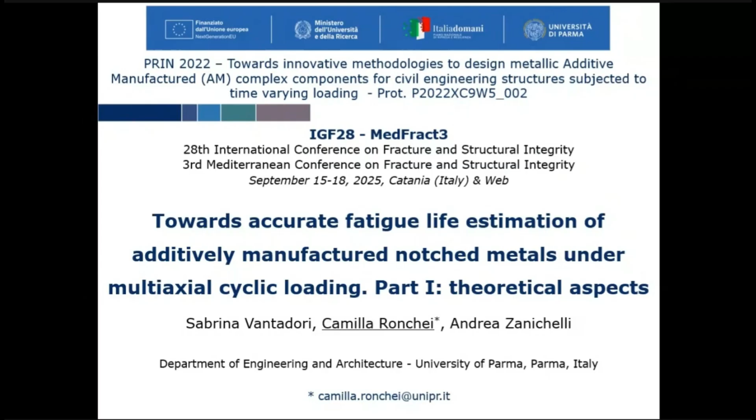The present work deals with the proposal of an analytical methodology for the fatigue assessment of notched components made of additively manufactured metals subjected to multi-axial cyclic loading. Such a methodology is based on the application of the multi-axial fatigue criterion proposed by the research group of Carpinteri and Vantadori and the Taylor's point method.

The novelty lies in the identification of the critical point where the criterion is applied through the formulation of a novel critical distance, departing from the conventional El Haddad intrinsic crack length originally proposed by Professor Taylor for conventional metals.

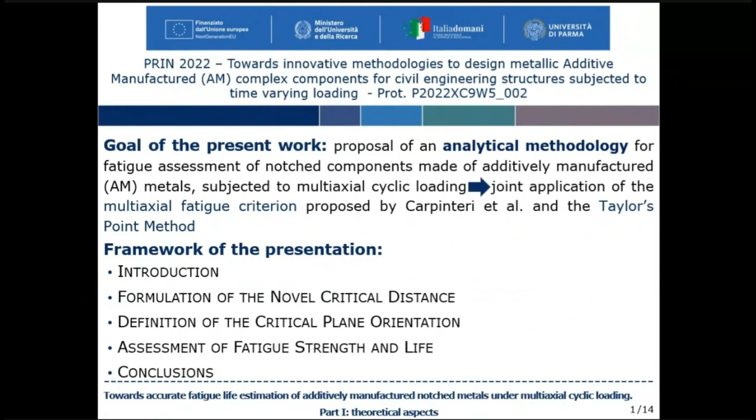My presentation consists of the following sections: a brief introduction related to the fatigue behavior of additively manufactured metallic components, then the formulation of the novel critical distance, the definition of the critical plane orientation, together with the assessment of fatigue strength and life, and finally some conclusions.

As is well known, additive manufacturing is characterized by many advantages with respect to traditional manufacturing techniques. For example, it allows the realization of customized structural components with complex geometries, and a considerable low material waste is produced by additive manufacturing.

However, AM components still face several open challenges related to uncertainties in their structural performance, especially under complex cyclic loading typical of in-service conditions. AM components are particularly susceptible to fatigue-related damage due to their typical high surface roughness and the presence of internal discontinuities. These serve as stress concentrators, which promote early crack formation, thus causing a shortening of the high cycle fatigue life.

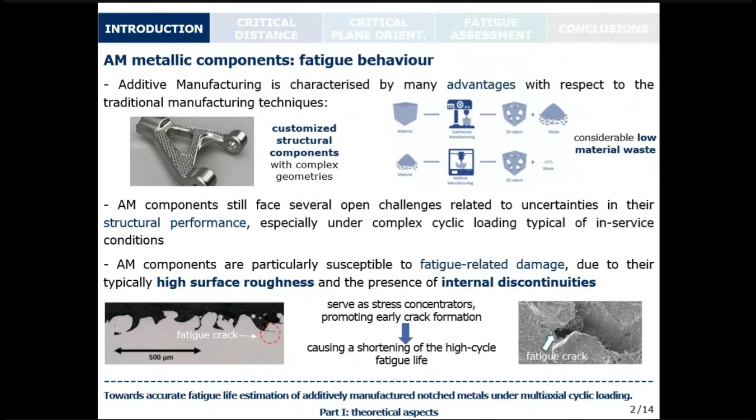Moreover, these detrimental effects become even more severe in the presence of notches or other geometric discontinuities, which further amplify the local stress fields. In particular, the combined effect of intrinsic AM defects and geometric discontinuities in a component subjected to multi-axial loading conditions results in a highly complex multi-axial stress state with multiple competing crack initiation planes influenced by both the orientation and the interaction of the principal stress directions.

Nowadays, therefore, the goal of research in the AM field is still to find and validate advanced criteria for the fatigue assessment in order to better exploit the use of such a powerful manufacturing technique. In this regard, it has been found in the literature that criteria based on the critical plane represent a valid tool for the fatigue assessment of AM metals.

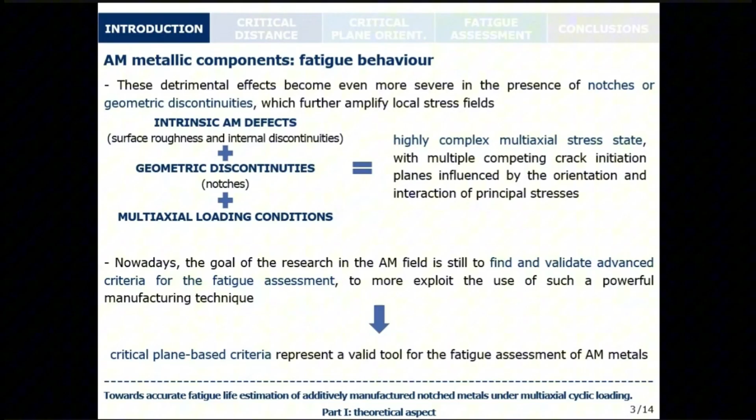In this context, the present work proposes an analytical methodology representing a first attempt to estimate the fatigue strength and life of notched components made of AM metals under multi-axial, medium, and high cycle fatigue conditions.

The main steps of the proposed methodology are here summarized. First, some input data need to be defined. Then, the novel critical distance is developed. The critical point PCR is identified at a distance equal to half of the critical distance RAM.

At this point, the stress field is computed through the formulation proposed in the past by Lazzarin and co-workers. Then, at this point, the critical plane orientation is determined and the fatigue assessment is performed according to the multi-axial fatigue criterion by Carpinteri et al.

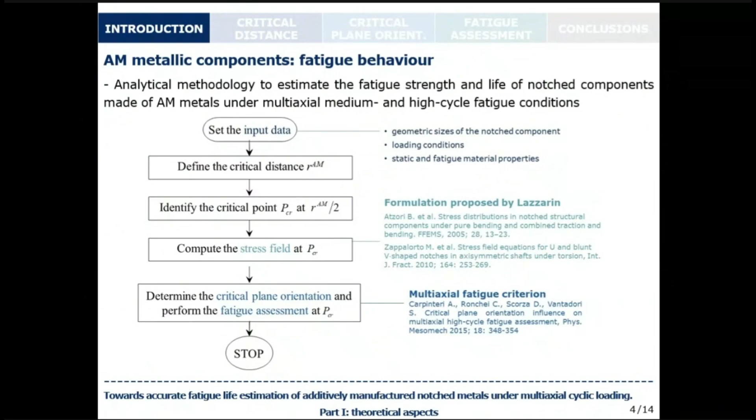Now, let me emphasize the innovative aspects of this work: the formulation of the critical distance and the identification of the critical point where the criterion is applied.

Although the main concepts of the point method are here adopted, the critical distance adopted to locate the critical point differs from the conventional value of the El Haddad intrinsic crack length, originally proposed by Taylor as previously said.

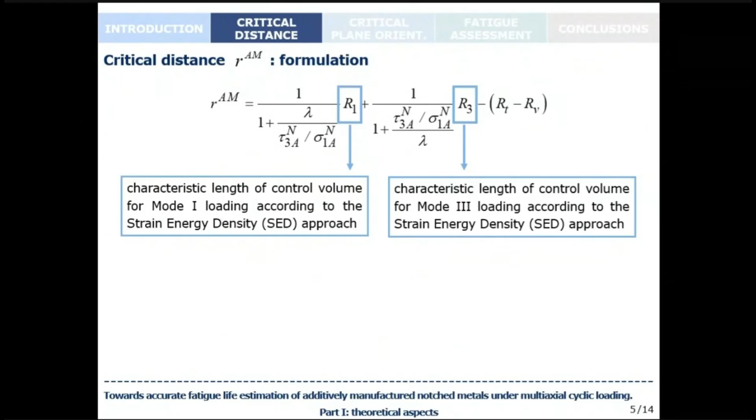In particular, the relationship for the critical distance RAM here developed is given by the present equation, where R1 and R3 represent the characteristic lengths of the control volume for mode 1 and mode 3 loading respectively, computed according to the strain energy density approach. The critical distance also depends on lambda, the biaxiality ratio, defined as the ratio between the applied shear stress amplitude and the applied axial stress amplitude, the ratio between the fatigue strength of notched specimens under mode 3 and mode 1 loading, and also a function of some surface roughness measurements.

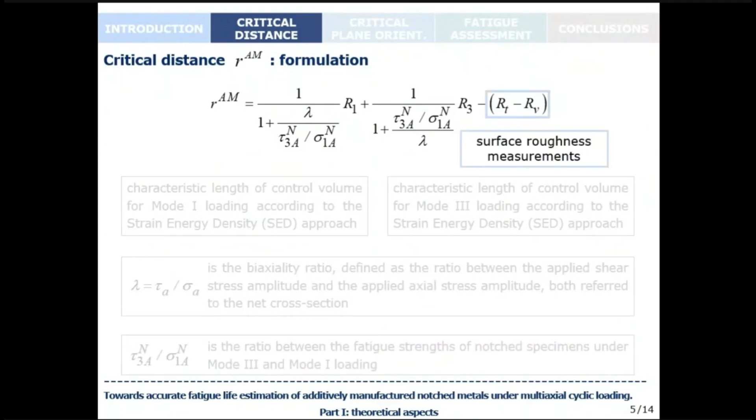Moreover, lambda in this term is divided by the ratio between the fatigue strength of notched components. It can be observed that for the same applied stresses, when the notched fatigue strength in mode 1 is lower than that in mode 3, the first term of RAM becomes more similar to R1. Analogously, when tau 3 AN is lower than sigma 1 AN, this first term approaches the characteristic length of the control volume for mode 3 loading.

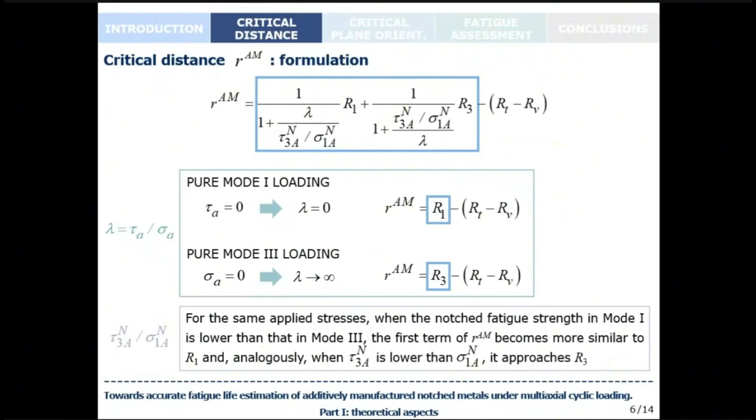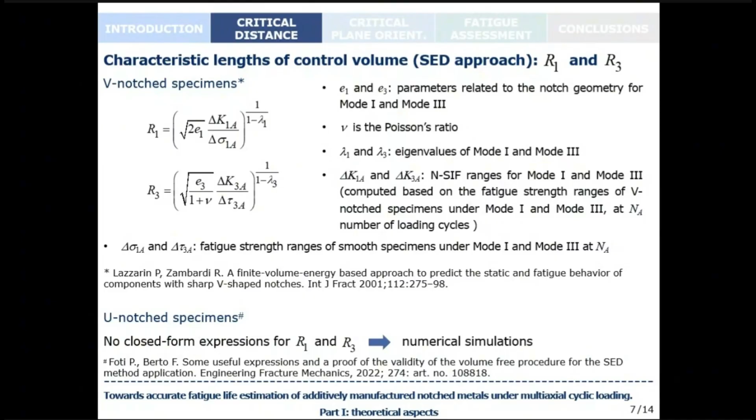As just said, the characteristic length of the control volume depends on the fatigue strength of smooth specimens. In this work, these fatigue strengths are evaluated as a function of the defect size present in the AM component, following an approach similar to the well-known one proposed by Murakami for conventional manufactured components.

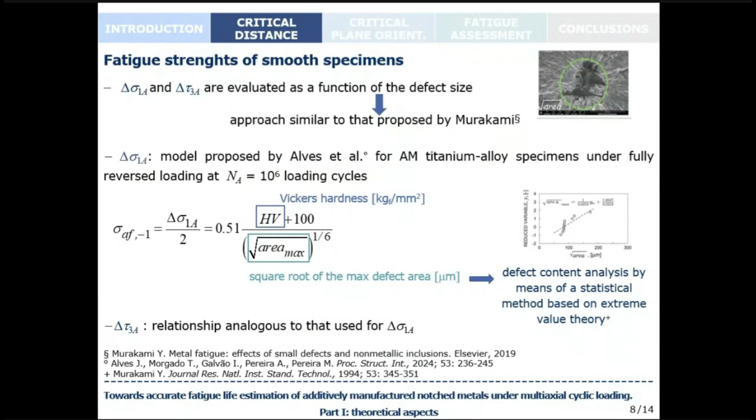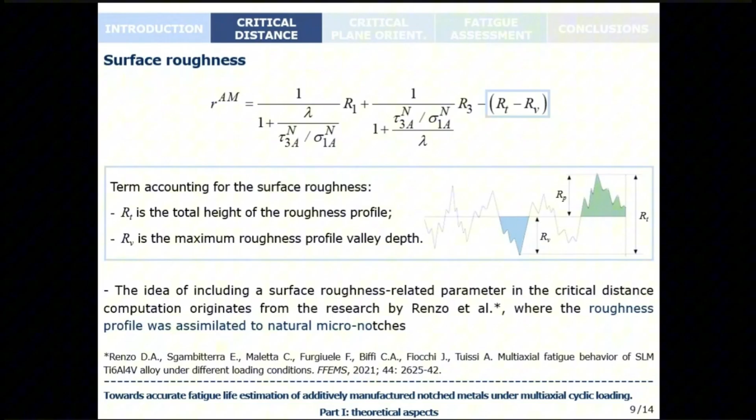Moreover, the critical distance RAM, as already said, depends on a term accounting for the surface roughness, that is RT and RV, which represent the total height of the roughness profile and the maximum roughness profile valley depth respectively, as depicted here. The idea of including surface roughness parameters in the critical distance computation originates from research performed by Renzo and co-workers, where the roughness profile was assimilated to natural micronotches.

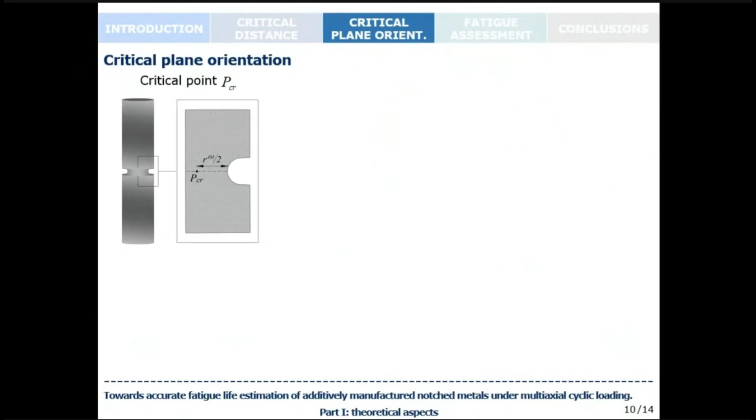Once the critical distance is defined, the critical point PCR is identified at a distance equal to half of RAM from the notch root along the notch bisector. Knowing the stress field at this point allows the computation of the principal stresses sigma 1, sigma 2, sigma 3, together with the corresponding principal stress directions 1, 2, 3, identified by the principal Euler angles phi, theta, and psi.

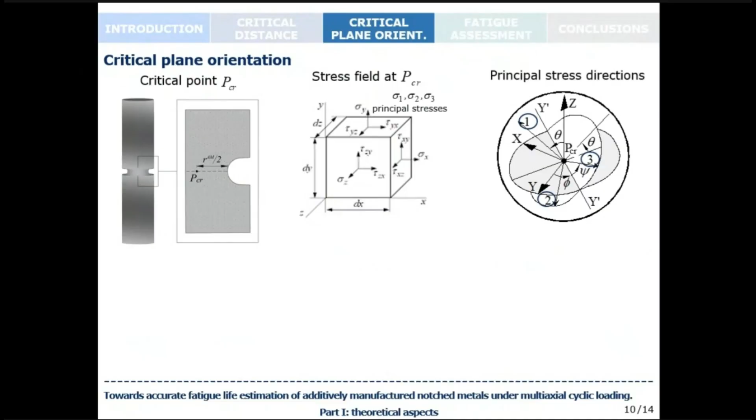Since the direction of the principal stress axes are generally time varying over time in case of multi-axial cyclic loading, their average direction has to be taken into account.

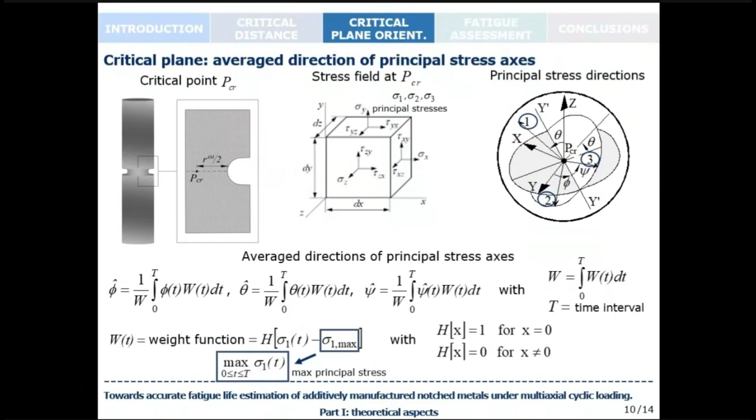In particular, by using the weight function here reported, the average direction of the principal stress axis coincides with the instantaneous ones at the time instant when the maximum principal stress sigma 1 attains its peak value over a loading cycle.

Finally, according to the present criterion, the normal to the final fatigue fracture plane, which is the one experimentally observed post-mortem, is assumed to be coincident with the average direction 1-hat.

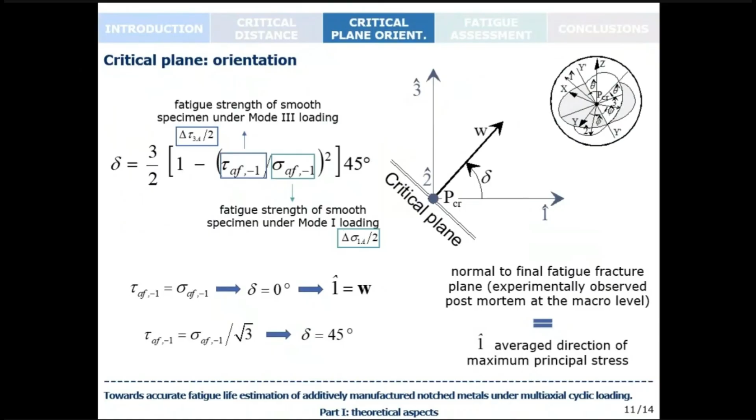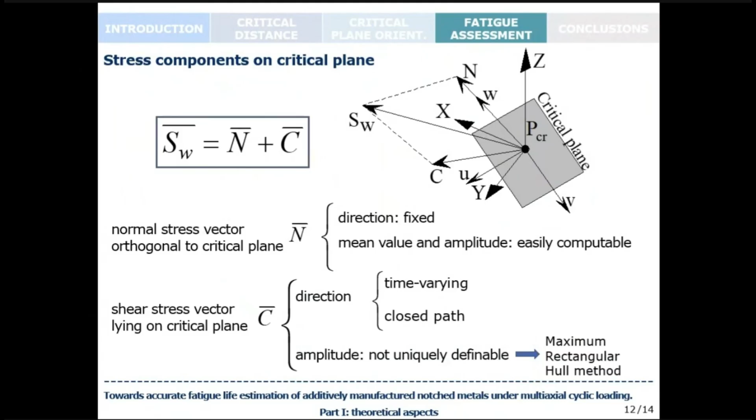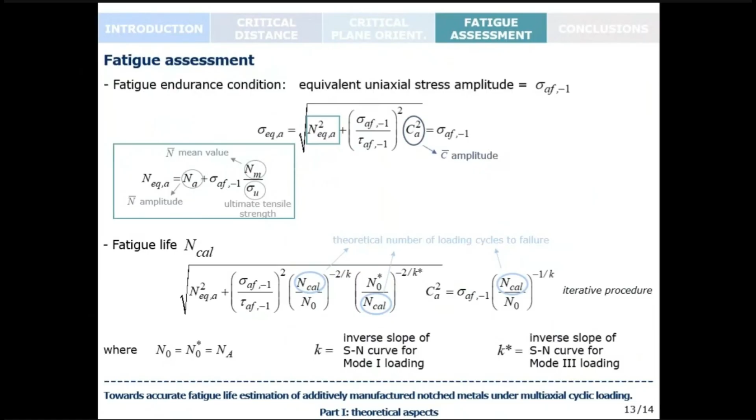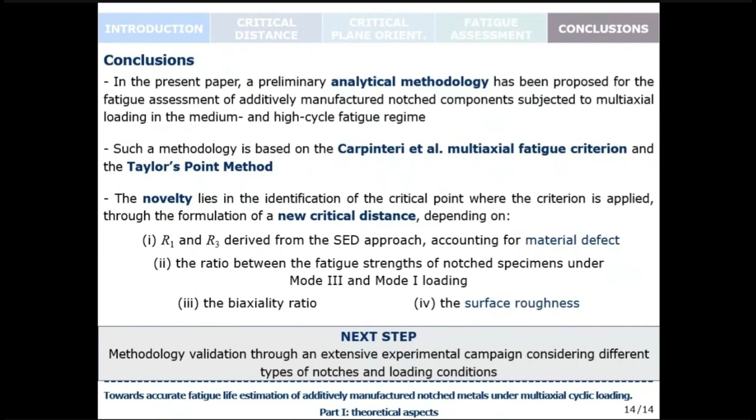In conclusion, such a methodology, in order to demonstrate its potential, has to be validated through an extensive experimental campaign, considering different types of notches and also loading conditions. Such a validation will be presented in the next talk by my colleague, Andrea. Thank you for your kind attention.